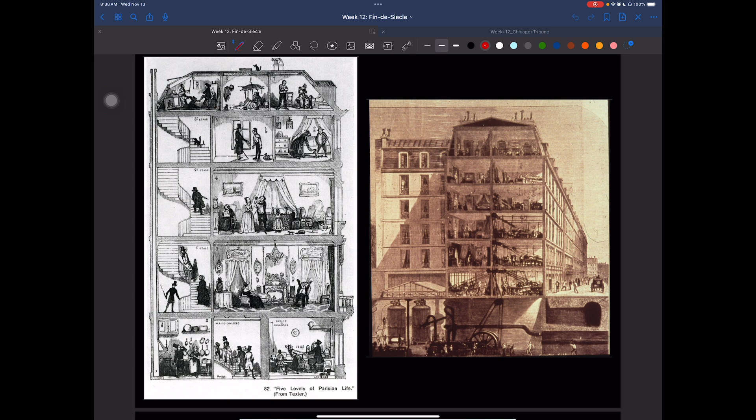And then as you go up it begins to get lower and lower in class, right? So then you have the middle class above that, the lower class, and finally at the top you have your struggling artists. You have other people who are servants for different households, maybe for the middle class, but you have this very harsh hierarchy of class systems.

And because of that, we do have posters like these that are pretty much a heavy critique of the capitalist system. You can see at the very top you have your monarchy. It's almost like that one diagram I've been showing you all these past lectures, except now it's criticizing that system. We have our monarchy at the top, and even though they have constitutions now, they do have certain limitations of power.

They are still very abusive of the lower classes. We have the clergy, our soldiers, our middle class, and finally the working class at the bottom.

So for today's movement, we're really going to be talking about that middle class. Notice that they are being criticized here, even though they're not upper class and they are middle class, they are still the people that own and work the factories. That is how they make their wealth, so they do very much exploit that lower class.

But there is a group of people within the middle class that wants to change that. They want to reform the world, do something much more clean, with better working conditions for everyone. They're trying to be more enlightened, if you will. And those people are going to be the ones that form what we call the Art Nouveau movement. So this is the type of art that we are portraying.

If you look at it very closely, there are a lot of natural motifs going on, very soft curves everywhere. It is very much a reaction against the very harsh industrial nature of the city at the end of the 19th century. So whereas before they had these stuffy Victorian gowns, all black, looking very prudish, they are now using much softer textiles, draping them using softer colors.

So we're not going to have these large Versailles type of palaces. Instead, we're going to have something that looks more like this. One of the goals of Art Nouveau is to create a sanctuary in the home, because industrialization is so dirty and loud, and it's disrupting family patterns. The home becomes a sort of sanctuary from the urban state, and designers really try to incorporate as much nature into that in order to give you that escape and relief from the urban fabric within your home.

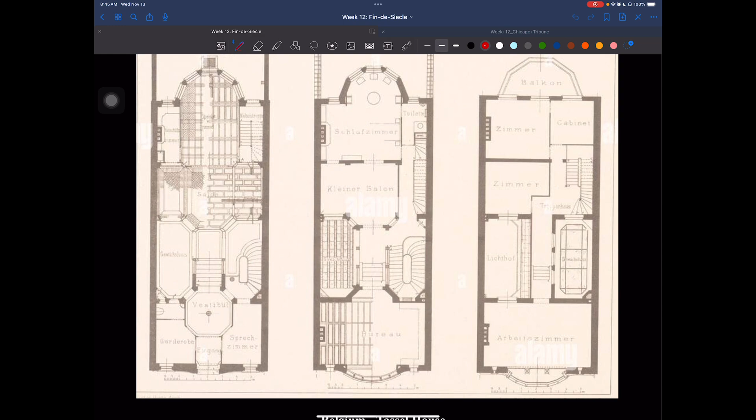So this is a multi-story townhouse in Brussels. This one is called the Tassel House, the central one right here. I want you to notice how different the language of it is from the two buildings next to it.

It might not be too apparent, but notice that the windows on the middle panel are just glass and iron. There are no stone supports there compared to what's going on next door, where you have these punch outs from the stone architecture. In the Tassel House, all of this has absolutely no stone inside of it. These are stone, but if you look at it, they're in front of the iron and glass curtain. If you think about modernism, we think about curtain walls, which are all iron or aluminum and glass with no stone or heavy supports, and that's what's going on right here.

So we're beginning to see a little bit of a move right there. Here's a close-up so you can get a better idea of what I mean. All of these are metal supports, and they're very thin, and they make this wall look like it's disappearing. For us, it might not seem that way since we're used to seeing buildings that are completely clad in glass, where we wouldn't even see these mullions, but for the time period, this was considered very translucent, transparent, and open.

As you walk in, I think you can begin to see that this style has nothing to do with anything that we've looked at before. There's no classicism in here. We don't have any capitals, no entablatures. We don't really have the same type of arches we've been seeing. There's nothing about it that's really Gothic. It's just purely inspired by nature.

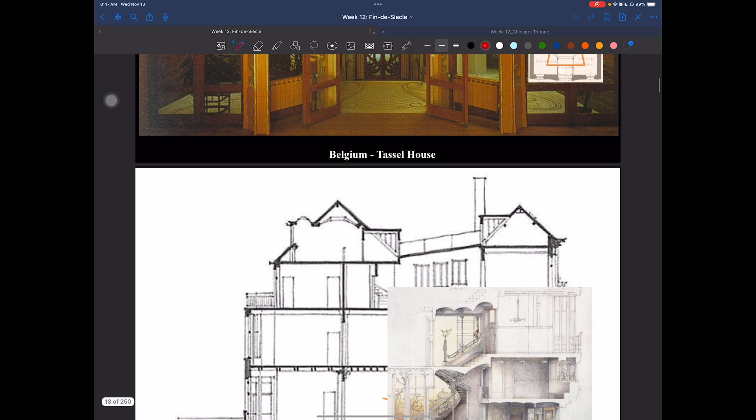The house does have this kind of split level motif, so that I feel as if it expands once you get into this area back here, which really accentuates the idea of it being a sanctuary as you get into your home.

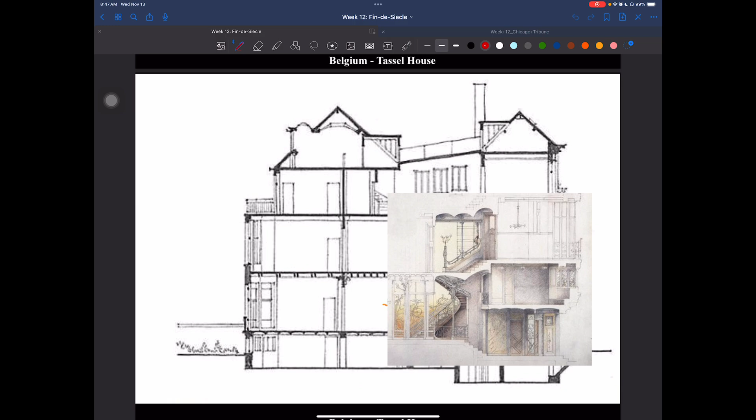This is just a really cool rendered section. If you look at that piece right there, that staircase, that's probably the most famous part of this house, and this is what it looks like. Some of you have probably seen this image before - this is probably the definition of Art Nouveau. Again, everything is made in the same style, the mosaics are made in the same style. The staircase has these really soft curves that invite you to go upstairs, so they're not very rigid or orthogonal pieces.

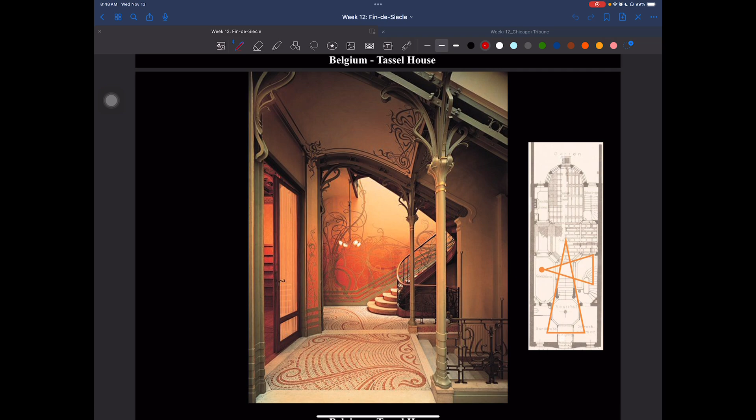The lighting inside of it, the coloring, all of it really contributes to create an environment inside of the building. Nowadays it is a hotel, but originally it was a home for a pretty large middle class family.

The next one we're going to be looking at is the Solvay House, which we see right here. It's a little bit larger, and it has this double bay, but notice that we do still have the full curtain wall going on right there. These are not very thick stone supports, they are made out of metal, so this whole front piece is glass. And you can see that even next door in this building that we clearly tell is much more modern, probably from the 60s, 50s, they don't use the glass in the same way.

It's still very much punctured into the masonry compared to what's going on at the end of the 19th century. So it's quite modern for their time.

Last class you mentioned an example of the iron rod that was in the middle of one of the rooms we were looking at. It had like they were welded on, the leaf looking one. Is this going to be something we start seeing a lot more?

So that one was more so a playful form of exoticism, so they still believed there was a capital with a palm tree at the top. In this case, the only reason it's splayed out like that is because structurally they're trying to create these trees that support, if that makes sense. But they didn't really see it as being a capital because they're trying to break away from classicism. Gotcha, so it's similar in form structurally, but the idea is different.

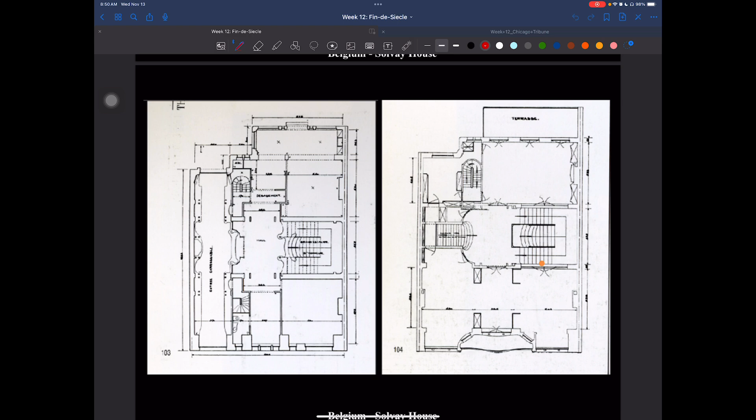So you enter in this doorway, again, totality in design, and then you come into this large staircase. Notice the forms are not square, again, they're very nice and rounded. The staircase itself looks like something out of the Titanic, which did have Art Nouveau styles inside of it as well. And then it kind of curves around itself.

They're going to have these really beautiful patterns, usually some kind of nature imagery, and that's in order to bring in more daylight. Remember that these are townhomes that don't necessarily have that many windows on all the sides, so the more skylights you can have, the better to illuminate that home.

These are their parlors, right? So it's made completely out of wood, handcrafted. It's one of the things about Art Nouveau, it does take a lot of work still, even though they are industrialized materials, you do still have to have someone with craftsmanship who knows how to weld and how to carve these pieces. So that's ultimately one of the reasons Art Nouveau doesn't work long-term.

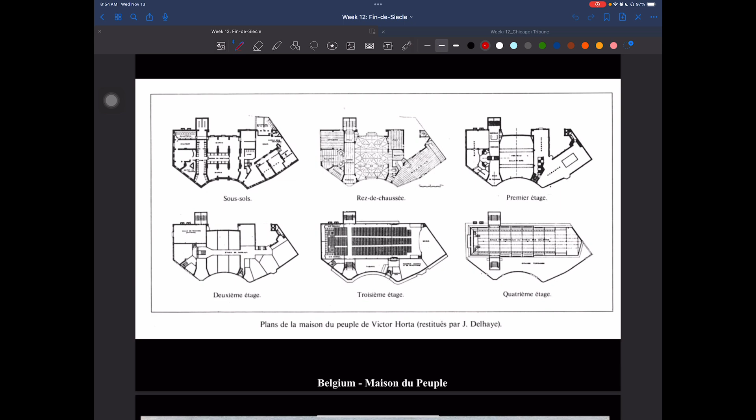Today it's been replaced in this building, so that entirety of the facade, you can see they kept the shape generally, but they did destroy the entirety of the building, and then they built this tower on top of it. So it does not exist anymore, unfortunately.

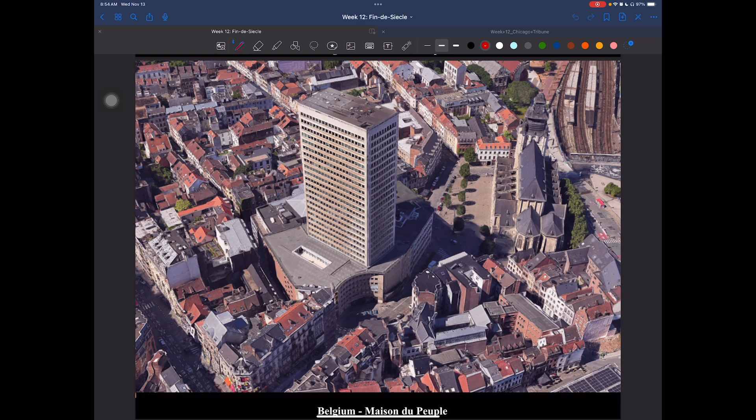But when it did exist, you can see Victor Horta using a lot of the same techniques that he used in the homes inside of that top assembly room. So he does light it up very nicely, brings in a lot of natural daylight through skylights, clerestories, curtain wall in the back over here, right? So he doesn't want this to be a stuffy parliament assembly room like the ones that are traditionally used by the monarchy. He wants it to be something fresh and new.

And you can see the whole structure reads very lightly. Even these balconies right here, they don't seem like they're weighing down on the architecture.

This is another part of it with this big dome, right? I think you can see a little bit more of that Titanic type of architecture in this case with a big glass dome. But it's very open, it allows lots of daylight, it allows you to see what other people are doing, right? So this idea of the architecture being transparent and being honest and telling you what it's truly catering to becomes popular at the time.

Now in France, I'm going to show you some metro stations. Okay? So a lot of these still exist. If you ever go to Paris, you'll see a couple of them. But this is what we call zoomorphism. Zoomorphism is when you take animals and use them to directly inspire your architectural pieces. So in this case, this is a good example. You saw the metro has these kind of eyes looking down overhead. I'm going to turn on the lights since we can't really see the color that well.

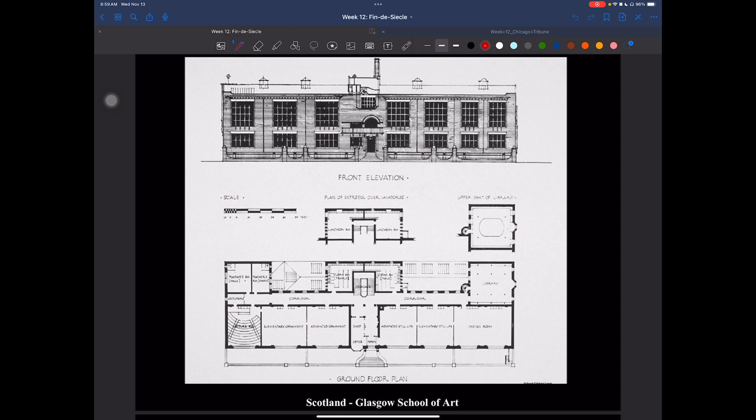They do have an architecture school here as well. This is the library we're currently looking at extensively. On the second floor, you can see this is for junior architects, and then for the ones who pass and eventually get in, you have your senior architects room.

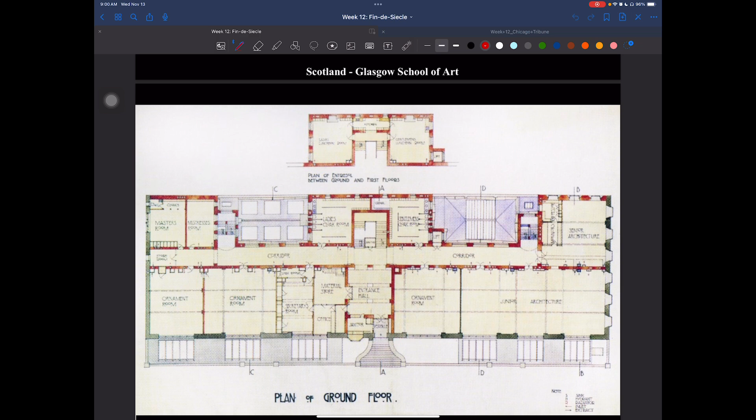Notice that all of these are ornament rooms. Why are they ornament rooms? Because a big part of Art Nouveau is knowing how to make ornamentation, again, not just for the building shell, but for the furniture and everything that goes on inside of it. So you need to teach people how to do that in order to keep creating this type of architecture.

From the front, you can see it does look like it belongs in Scotland - it has that vernacular stone. But you can begin to see that they're breaking apart the stock a little bit, so it has this really interesting curvature right here. Generally, if you had seen this and didn't know any better, it almost looks like an early modernist piece. We're beginning to dematerialize that wall - that's a full curtain wall right there, full clerestory up here.

There's a little bit of the Art Nouveau shining through - you have this kind of chintzy piece. And if you look at the iron decorating it on the front, it's a little bit more subtle than the French or even the Belgian version, but notice you do have these kind of flower pieces. So rather than just making these square pieces or a kind of balcony around your window, they did this instead.

Here's what the inside of it looks like. This is where the library is going to be. Notice it almost looks like factory type architecture, which is interesting given that the whole point of Art Nouveau is to look more natural. But again, I think you can see we're beginning to move into what is going to be modernist architecture.

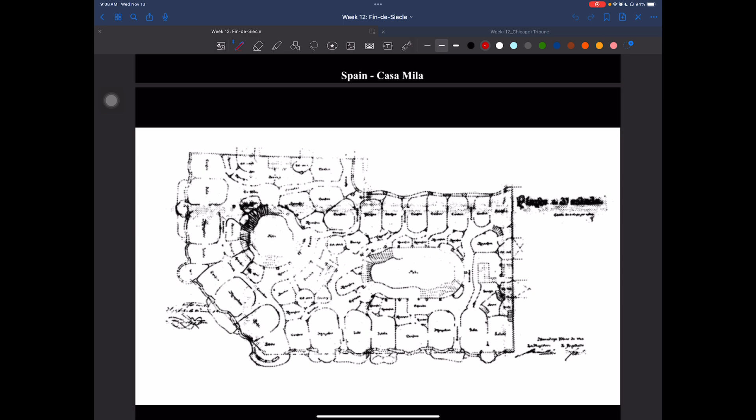This is what the general plan looks like. So in Barcelona, when you're on a corner, you have to cut it off at the end, so that you have this octagon of space in the city grid. He introduces two kind of atrium pieces, courtyard pieces. This is what his idea of it was, all these bubbles kind of coming together. You can see the planning is very organic. This would pretty much be any contractor's worst nightmare because of all the different angles going on.

And again, this is part of why Art Nouveau does not become the style of the century. It's just too much work and it's too expensive, even when you use industrialized methods.

This is one of the cartoons they were making at the time to make fun of the owners and Gaudí. They thought he was kind of like a clown architect, but I think it goes to show, even when people don't like your architecture, that's a good sign, right? They thought it was going to be like a Zeppelin garage.

Now Gaudí does take very specific inspiration from a certain type of creature, and I think you'll begin to see what animals he's looking at just by the motifs he's using. These are his railings, and they look very much like seaweed. These aren't the florals being used in Paris or in Scotland. Instead, he's using seaweed, a lot of sea inspiration. The whole point of the Casa Milà is to look as though it's been eroded by the ocean itself, like a grotto.

Notice that these are all individual stone pieces that have to be hand carved, but notice how seamlessly they fit together. If they were to plaster over this, it would look like this beautiful undersea grotto.

So there's a little bit more of that seaweed. And even though it doesn't look as finished or as neat as the flowery pieces being used in Belgium, it's a lot of work to make it look this distressed and organic when you're working with a material that's very, very hard.

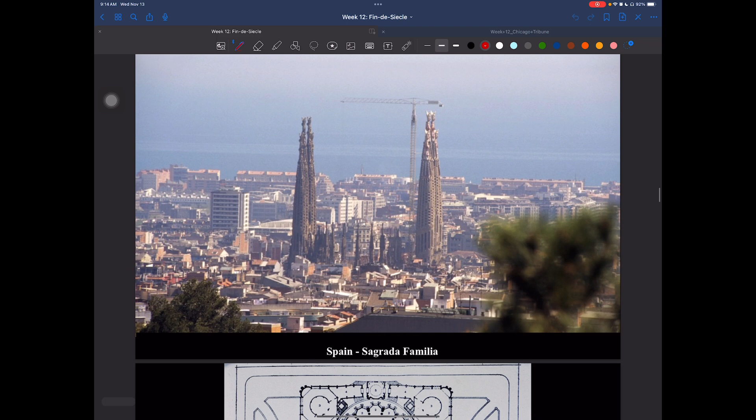And then his most famous piece, the one you've all probably seen, is the main church of Barcelona, the Sagrada Família. Famously, it is still under construction, but it is set to be done in 2026. So if you're planning to go to Spain, just wait a year or two so you can see it completely finished. It is what we call a Gothic revival in Art Nouveau style. You'll notice there is some Gothicness to it as far as the structure, the fact that it's being built over 2-3 centuries at this point.

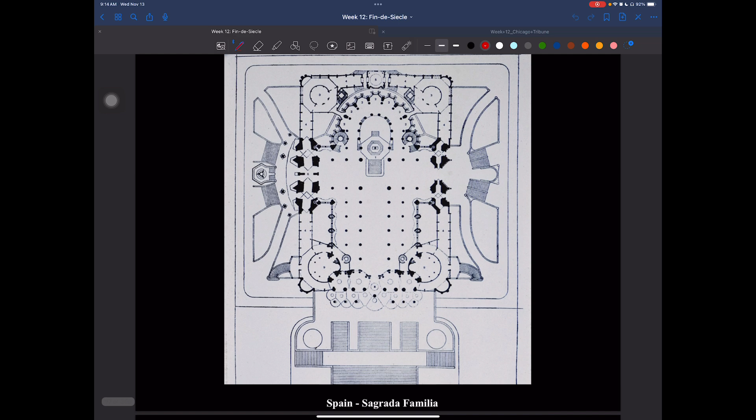But notice in the plan, even though this is a Latin cross, it looks like an animal, even in plan—it looks like a bear, sea creatures, whatever you want to see in it. It doesn't look like a traditional boring Latin cross. It has a lot of zoomorphic qualities, like the stairs, the way the columns are arranged in the front, and the way that the apse is done at the top.

Gaudí does have very specific inspiration for this. He's one of those architects that's not only an architect, but an artist, a scientist. When he devises the structure for the Sagrada Familia, he uses sandbags with wires and chains to inspire his curves. When you get to structures, you'll learn this concept - basically, when you design a structure, you want to use what gravity would naturally give you in order to have the path of least resistance. By doing this, he's emulating, if you turn it upside down, the shapes that would naturally occur. Because they're naturally occurring, nature helps you with the structure - it's not working against it because it's what the material naturally wants to do.

So this is one of the transepts. Most people think that this is the front of it, but the front isn't actually done. This is just one of the arms that you can enter on. Heavily carved - it also looks like an ocean if you look at it closely. There is this sense of having stalagmites coming from the bottom. There is a family itself with Jesus.

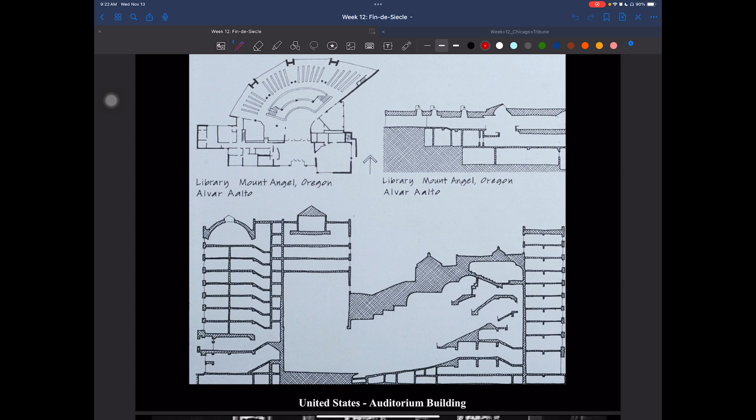It looks very normal. It doesn't look much different from any other building. It does have its rustic base and its top, but it's really on the interior where he begins to carve out these spaces. This is the auditorium room—notice the forms he's using inside; they are sculpted, not just orthogonal lines. Even the shape of it in plan, you can see it's not symmetrical. The entryway might have looked like a regular run-of-the-mill rustic base, but notice it's much more irregular—there are pieces at the top sticking out. It's not uniform; it looks a little more eroded.

Inside the auditorium itself, he uses what we call plaster casts. They make the forms, put the plaster inside, and then copy and paste them all over the place. So all of these are cast and then applied to the surface as a very low relief ornament.

So this is what it looks like in the United States—much more industrial, and not as voluminous as what you see in Spain.

So Louis Sullivan's is a little more subtle—you have to be up close to really look at it. But even then, making the molds for these pieces requires a lot of work, which people don't necessarily want to invest money into.